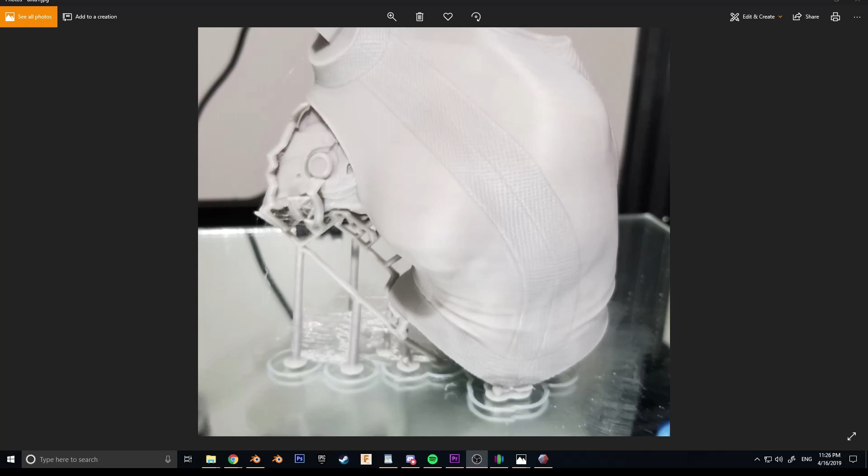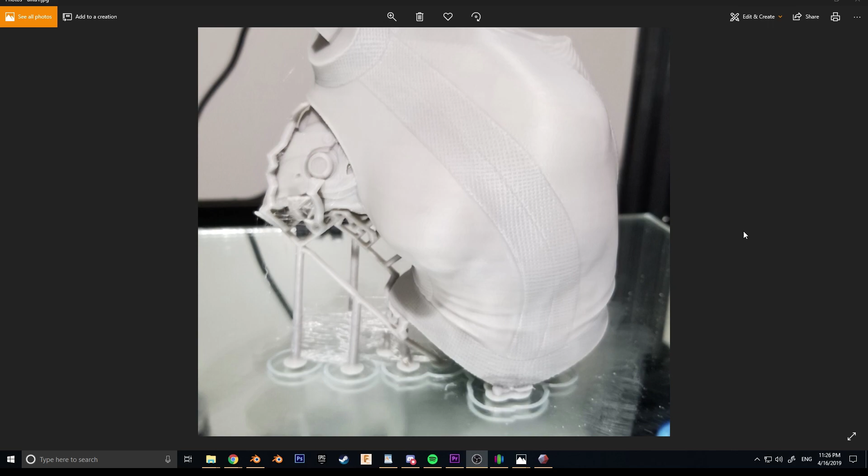Many of you have asked me to make a tutorial about how I generate my Meshmixer supports, so here it is. Before we jump into Meshmixer, let's quickly take a look at why you might want to use these types of supports as opposed to the traditional support structures that you would see in Cura or Simplify3D.

Whenever support material makes contact with your mesh, it's going to leave a rough surface. Meshmixer allows you to minimize the point at which your supports contact your actual print, meaning that you can minimize the amount of rough surface area. So as you can see on this model, I have this feature here being supported, this part of the shirt being supported, while completely ignoring the rest of this top surface.

This actually isn't touching my model at any point except for right here. It's floating just ever so slightly above the surface. It's supported down here, where once the torso is printed, we'll completely cover up any rough surface left behind. Also, some parts of the underarm just couldn't be helped. You just needed support there. So there will be a tiny rough surface wherever these supports contact it, but it'll be minimal.

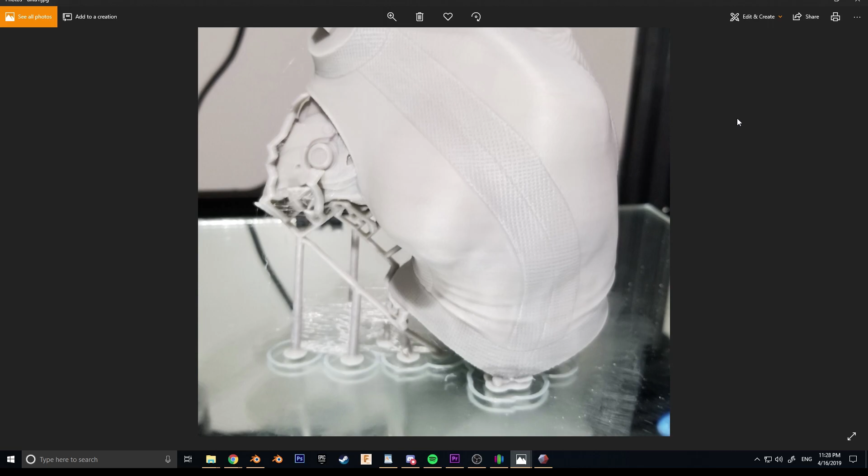And it's such a nice print, even at 0.1 layer height, that it would be a shame to cover this whole thing in support like you would with some of the other support structures. However, these supports do come with a pretty large drawback, and that's this. They do have a tendency to break or wobble during a print if they get too tall.

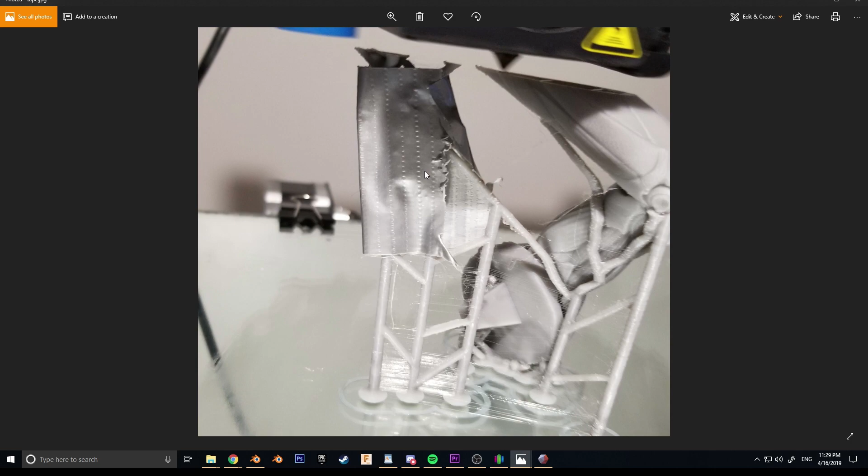This is the arm for this model, and as you can see, I had to duct tape it halfway through the print because it started to wobble too much. And this added just a little bit of extra support so that it would fuse up here properly and then continue the print normally. If I had to print this again, I would generate this support in kind of a triangle and then have it meet at the point where the arm actually starts. This would have eliminated the wobble, but you learn from these things.

So as you can see, here's the model with the arm. The only rough areas are where the supports contacted the mesh, and they're very, very small. If you were to cover this arm with traditional supports, the whole thing would be rough. Here, only the tiniest little parts actually needed to be supported, and then everything else could print fine from there. This is a lot easier to clean up than half an arm. So let's get into the actual program itself now.

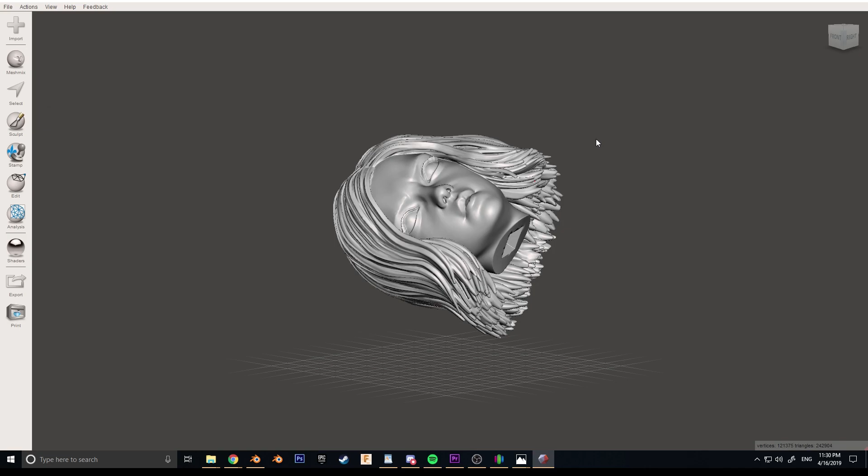When you open up Meshmixer, you'll be greeted with a little panel that allows you to import your model. Once you have your model imported, it's going to spawn in a random place, so you're going to have to actually make sure it's on the build plate. So come down here to Edit, click Align, and then just hit Accept. You can zoom out or zoom in with middle mouse scroll. Middle mouse click and drag allows you to pan, and right click and drag allows you to rotate.

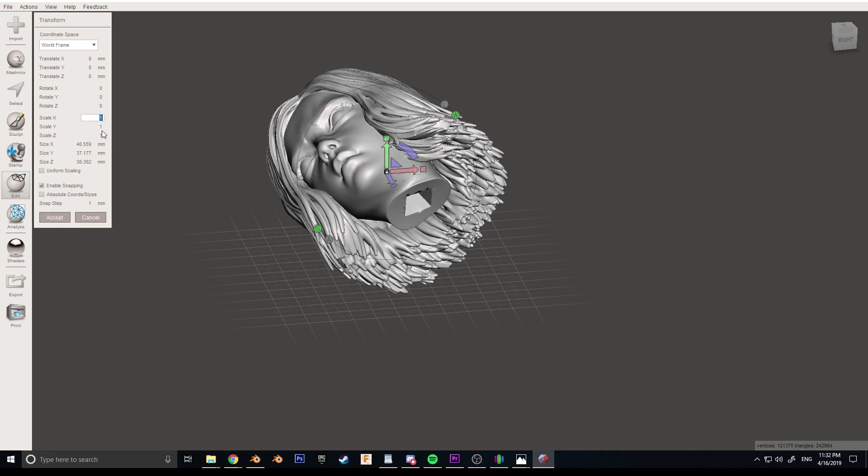Now that we have our model aligned to our build plate, let's make sure that it's oriented correctly. If you come up here to Edit and then Transform, you'll be greeted by these settings. If you're going to scale your model, you're going to have to do it here in Meshmixer because that will affect how the supports are generated. In my case, I want to make it twice as big.

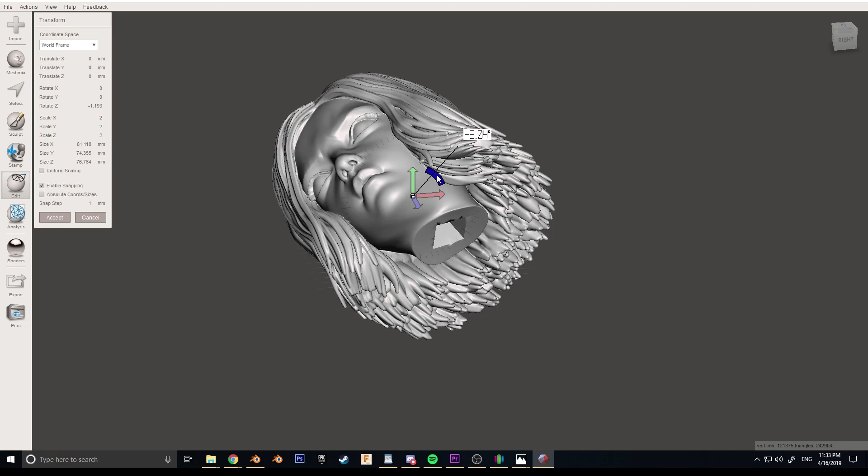Any settings that you change here, if you switch to any other tool before you hit Accept, it will undo those settings and you will lose everything you've done. So make sure to hit Accept once you're done. This is your local and this is your world rotation. I want to rotate everything and manipulate it in world settings. So I'm going to rotate my model.

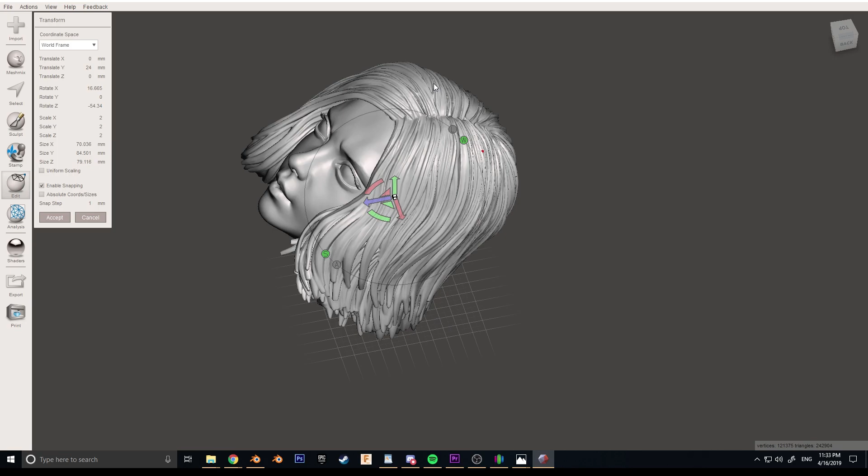That's about good enough. Most people print this particular model with the top of the head down on the build plate, but that's going to leave a rough surface here. And because you're going to be looking at this model from the top down, that's a pretty awkward place to have a rough surface.

Especially considering that's going to be hard to sand. This is a lot of detail that I don't want to destroy, so I won't really be able to do much cleanup work here.

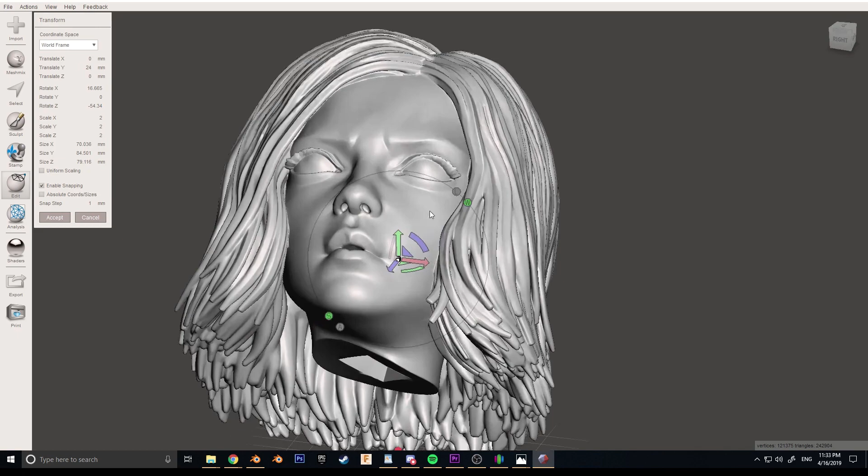And if I print it upside down, the eyelashes aren't going to have any sort of support, so I don't want to have to generate support on those. I'd rather they just print without support. This orientation will allow me to do that.

And this model, by the way, is about the hardest thing you're going to have to generate supports for. So if you can do something like this, then you'd be able to do pretty much any model.

Now that it's oriented correctly, let's just hit Accept. Come down to Analysis and click on overhangs.

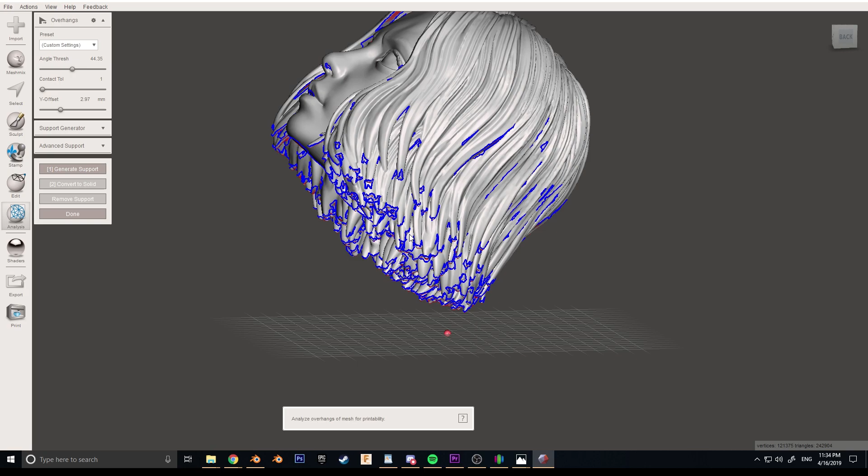Okay, so I've gone ahead and generated some support just so I can show you what all the different features of it are. So if you drop these down, you'll see you have a lot of options to play with. Most of these are self-explanatory.

For example, angle threshold at 90 will basically say everything is an overhang. At 0, nothing's an overhang. So it just determines what angle is considered an overhang. Don't go overboard with this, but also make sure that it covers the areas that you want.

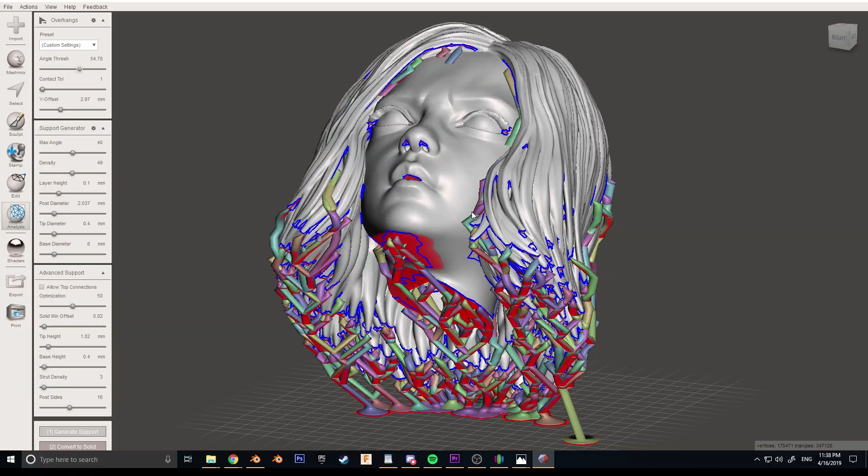These are what the supports look like. This is the base of the support, which is this setting here, base diameter. 8 millimeters usually works for me.

Tip diameter is the smallest the tip is going to get. You want that to be whatever your nozzle diameter is. In this case, I'm printing with a 0.4 nozzle, so 0.4.

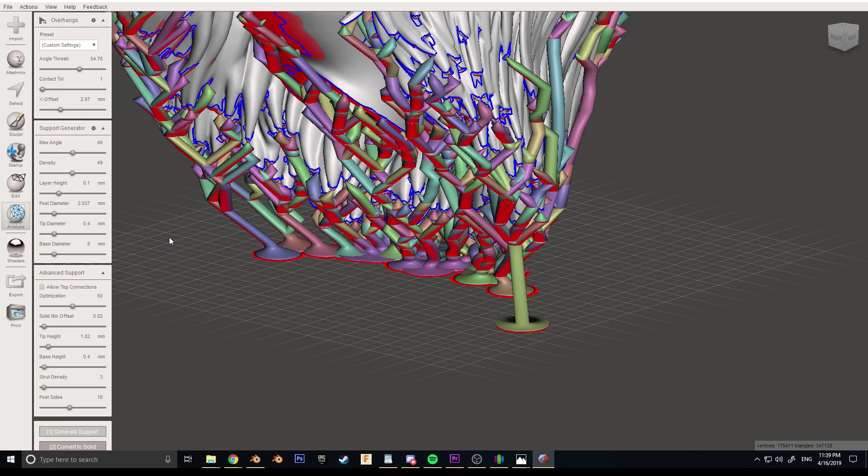Post diameter is the diameter of the actual posts themselves. Density is just how dense the connection points are, how many of them there are.

Let's see, what else is there? Tip height is this little tip section. How high do you want it to be? I'm keeping mine around 1 millimeter, and that seems to work great.

Allow top connections, as far as I can tell, sometimes works, sometimes doesn't. For example, right now it's off, so I don't think these should have generated, but they did anyway, so who the hell knows. And then Y offset.

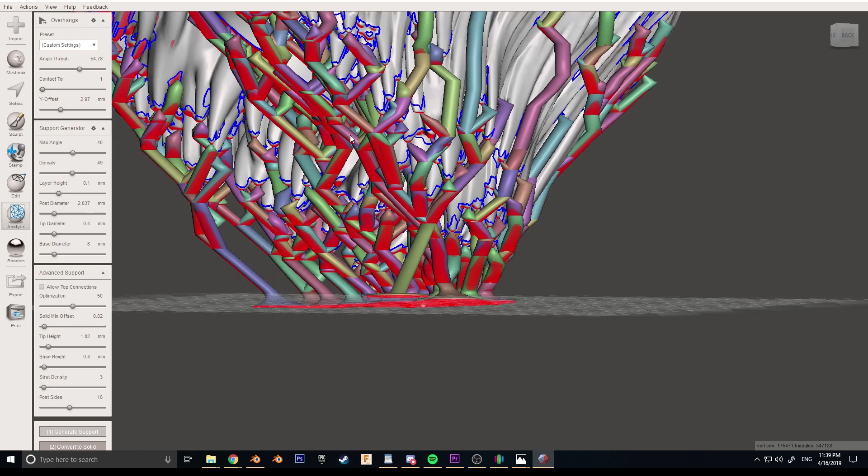Y offset, as you can see, my model is floating almost 3 millimeters off the surface, and everything in between it is support. That's what Y offset does. This is a Y up program instead of Z up, so just Y is your Z here.

Okay, so when you want to actually generate your supports, once you have your settings set to whatever you think is good, hit generate support. It'll take a bit. I would advise setting your post diameter not too low.

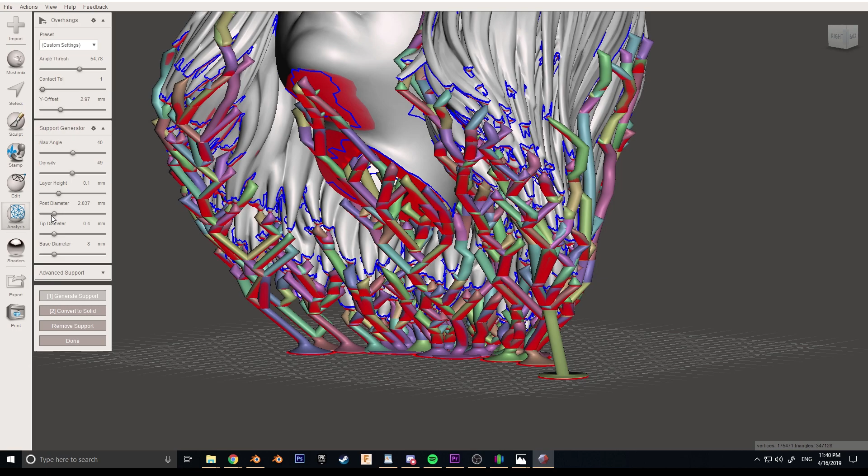If you set it too high, you won't get everything supported. If you set it too low, it's going to take ages to actually process. And the smaller this value is, the thinner your supports are and the weaker they are, and the more they're going to wobble or break off. So just keep that in mind.

Same thing with density. You don't want to set this too high, and you don't want to set this value here too low. If you want to make changes after you've generated support, you have to come down here and hit remove support. So if there are supports that you don't want, you can hold down Control and left click to get rid of them.

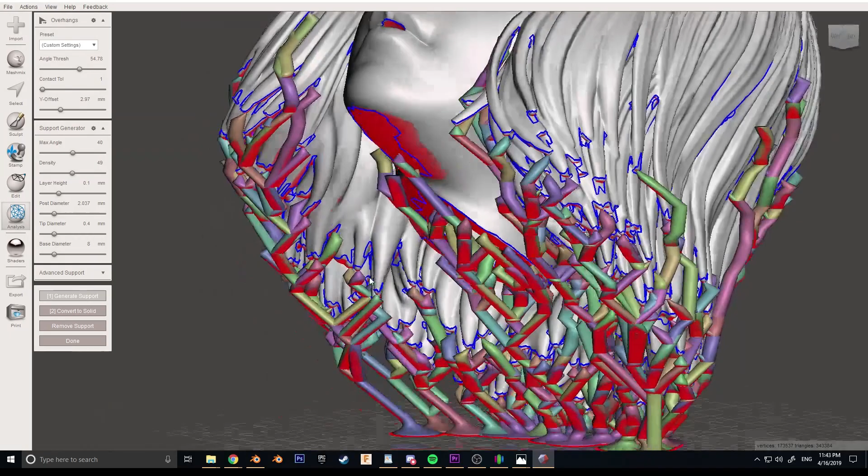If you want to add additional support, you can actually left click on your model and drag, and that'll generate a support usually. Sometimes it won't work, such as right now when I'm making a tutorial. Where I know it usually works is you can actually generate supports coming off of other supports and in between those supports as well.

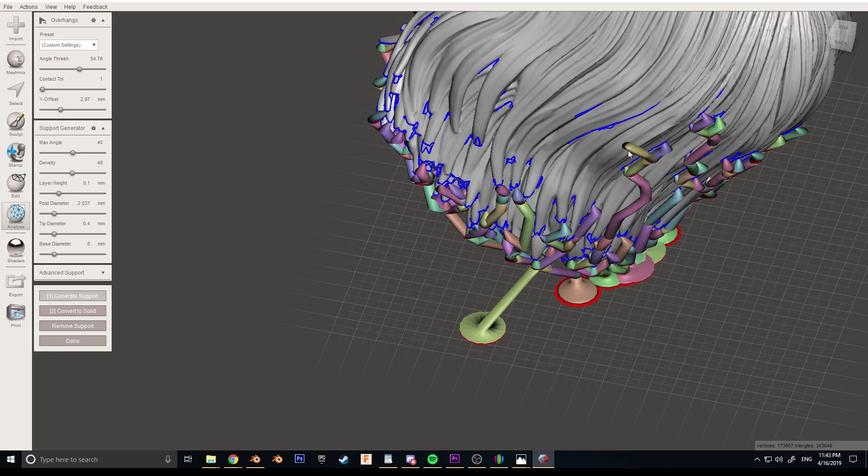So you can customize your supports that way, get rid of places where you don't want it, and add it in places where you do.

If you notice you're not getting all of your features supported, try changing the post diameter, setting it lower. If the posts are too thick, they can interfere with each other, meaning you won't get all the coverage you need. But if you set it too low, you risk snapping them off or breaking them.

This is going to require some experimentation on your part. Now, once you're done, hit convert to solid and create new object. Once you do that, it'll create a mesh.

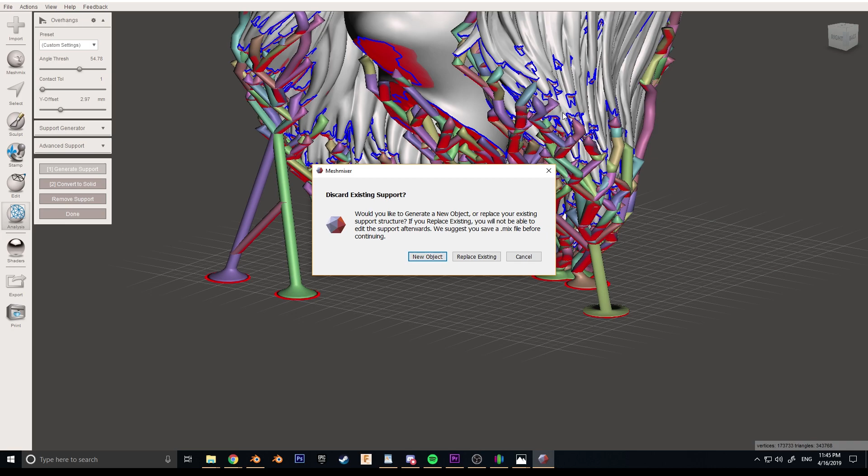Let's go ahead and do it. Okay, so now I've generated my mesh. If you don't see this object browser, come up here to view and click show object browser.

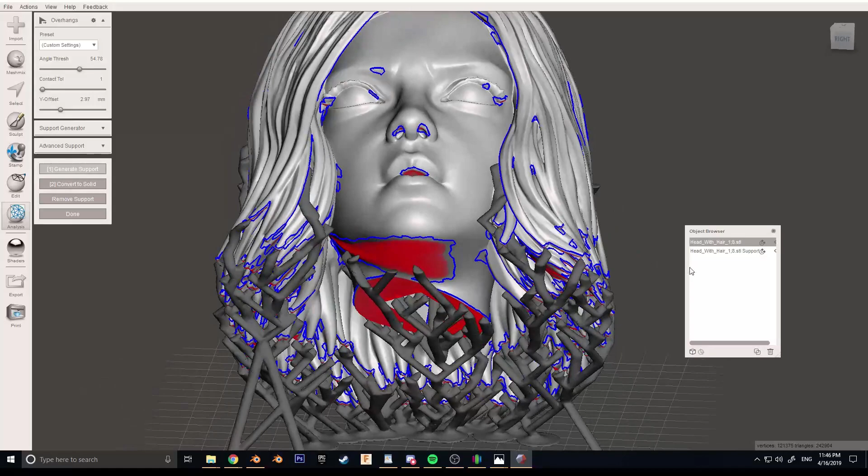Now, there are usually going to be some errors. Go ahead and hide your actual mesh and click on this, and you can see we have some floating points and some stuff we don't need. To edit that, click on select, circle it, and hit X, and that should get rid of it. Take your time, make sure not to delete too much.

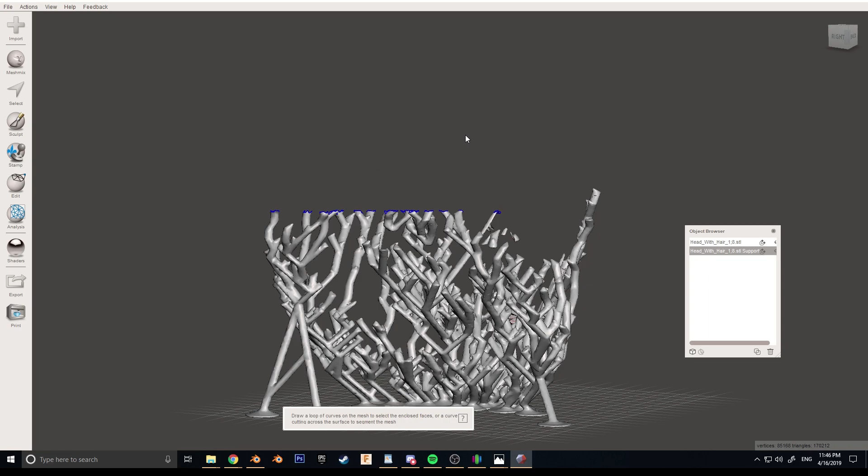Let me undo that. Make sure to delete just what you need, or rather what you don't want.

Once that's done, you can select your first model, make it visible, come up here to export, and export it as an STL. Then export your support structure as a separate mesh. That's very important.

So let's hop into Simplify3D. Once you import your two meshes, they might be in different parts of the build plate, or they'll look as if they're almost lined up perfectly.

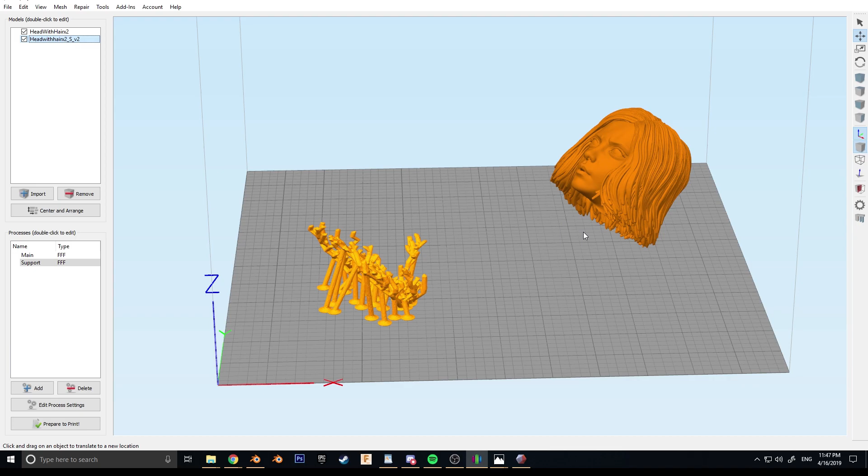Do not trust that. Do this: come up here and hit reset position on each one of them. That way you know it's exactly where it needs to be.

Select both of them, come up here to transform, and then move them back onto your print bed.

Now we're going to make two processes. Your main process, which you can name whatever you want, is going to be for your actual model, and then you'll have a separate process for your supports. Make sure not to have any support generated, because you already have supports now.

Make sure to have your retraction lift setting set to at least double your layer height. In this case, I'm printing at 0.1, but I have it set to 0.4, so 4 times as big. This is important because you don't want your nozzle bumping your supports, especially if you have them thin.

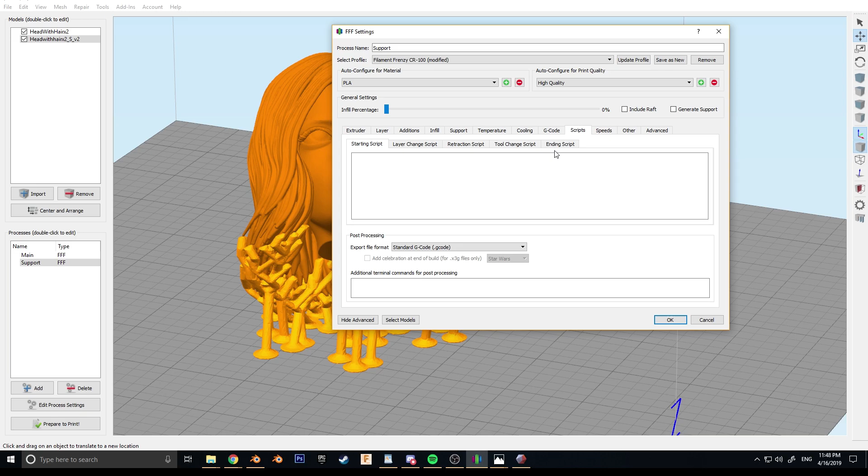Now, in your support process, same thing: make sure to have your retraction vertical lift setting set to whatever value you want. Make sure to get rid of your scripts so you don't have any starting or ending scripts, because that can interfere with your main process.

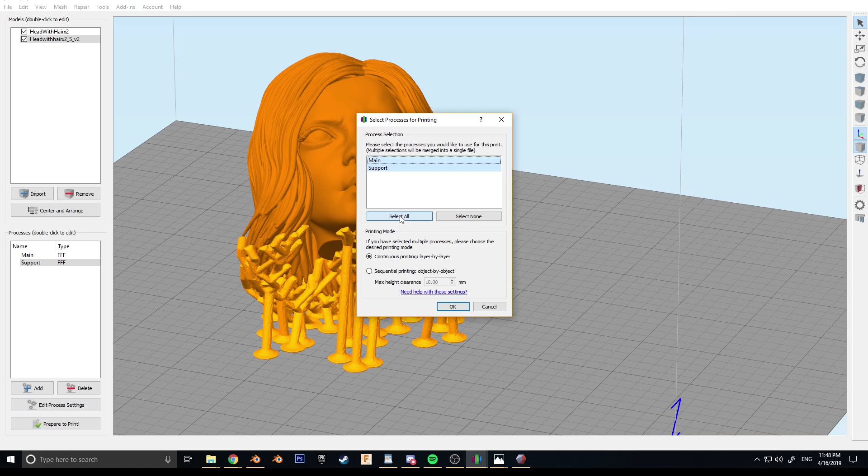After that, you're ready to slice. Actually, make sure to have the proper model selected in each of the layers. So here they are. Come down here to prepare print, select both of your processes, and hit OK.

Now that we have our model sliced, we can go ahead and inspect it to make sure everything looks good. As you can see, our eyelashes will actually be able to be printed without any support. Everything else looks fine, there aren't any floating bits.

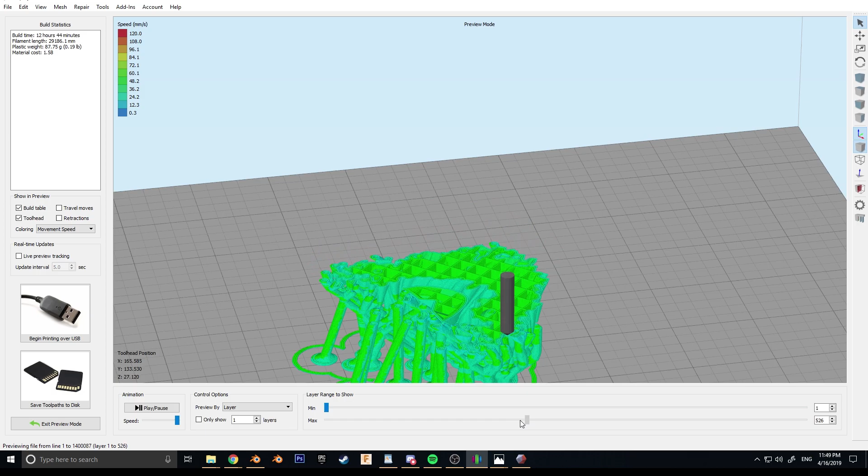Everything looks great. To help you inspect it, you can come down here and preview it by current process under coloring. Now you can see our supports are colored red and our actual model is colored blue, which makes it much easier to see where everything starts.

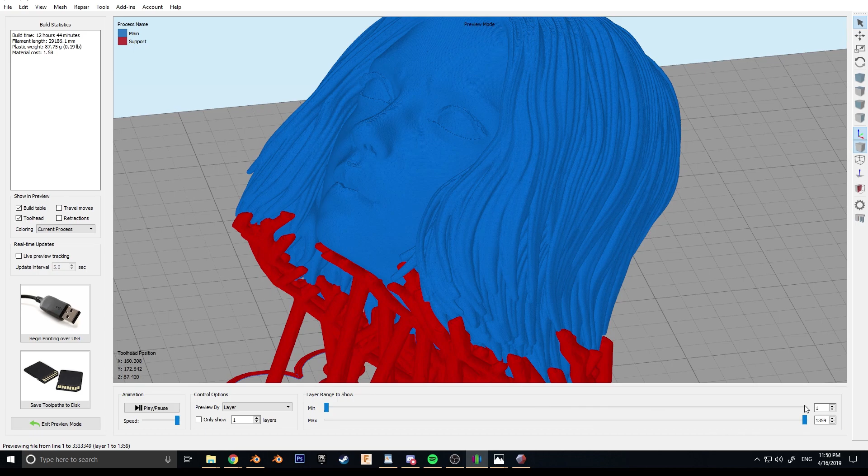After that, go ahead and give it a test print.